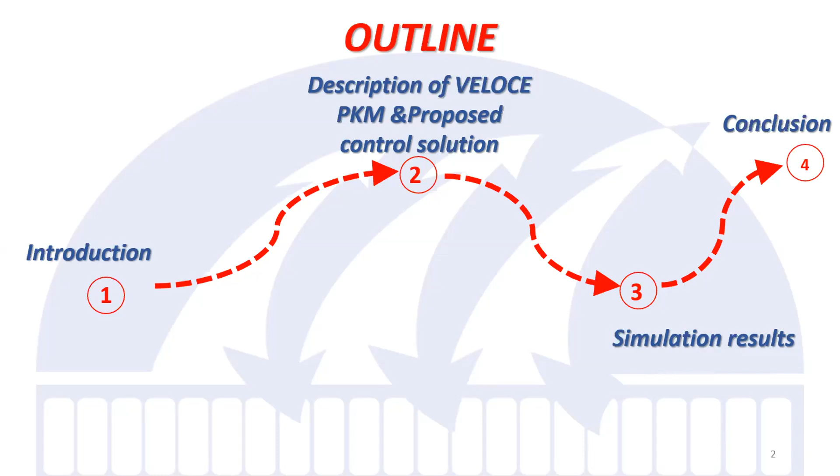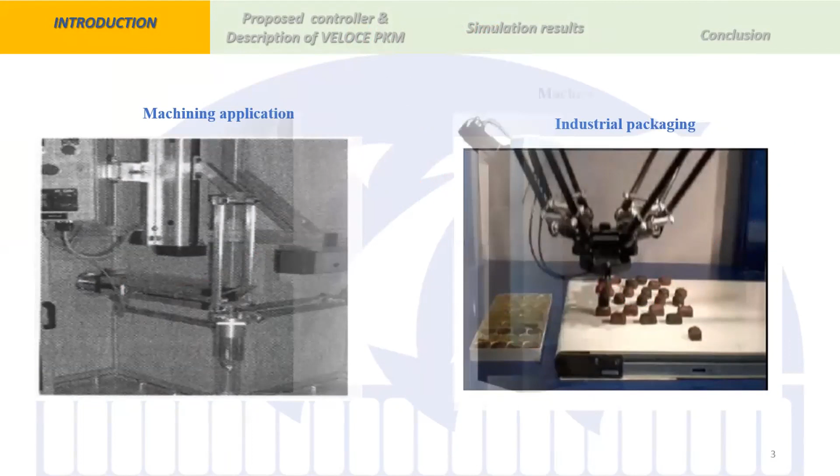During the last decades, industrial robots have played an important role in industry. According to their structure, robots are classified into two categories: parallel and serial. Parallel robots are used in a wide range of applications such as laser cutting, machining, industrial packaging, medical robotics, machine tools, pick-and-place applications, and so on. At present, parallel manipulators are the most suitable robots for tasks requiring high acceleration and high accuracy.

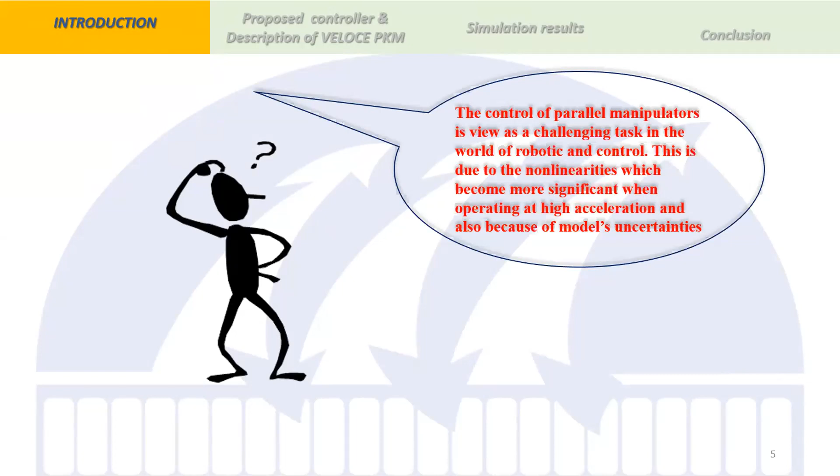However, the control of this type of robot is a challenging task. This is due to the nonlinearities which become more significant when operating at high acceleration, and also because of model uncertainties. In the literature, several control schemes have been proposed for the position control of PKM.

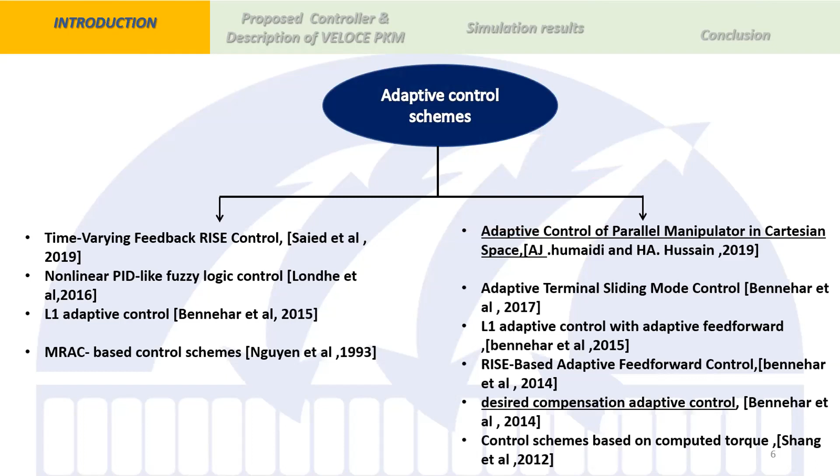These control schemes can be divided into adaptive and non-adaptive control schemes. In adaptive control schemes, we can find time-varying feedback RISE control, nonlinear PID controller, L1 adaptive control, and so on. In non-adaptive control schemes, we can find classic PID control, nonlinear PID controller, computed torque controller, sliding mode control, super twisting controller, and so on.

The super twisting algorithm is the most common second-order sliding mode algorithm. The super twisting controller generates a continuous signal which has the merit of canceling the chattering effect.

In order to enhance the performance of the super twisting controller, we propose to replace the integral term of the super twisting controller with a RISE control term. This choice is justified by the fact that the RISE control technique is non-model based and has the potential to accommodate a large class of uncertainties.

This control method is well known for a unique integral term, which is based on a signum function, as shown here. It can accommodate a large class of uncertain and nonlinear systems, like the class of parallel robots.

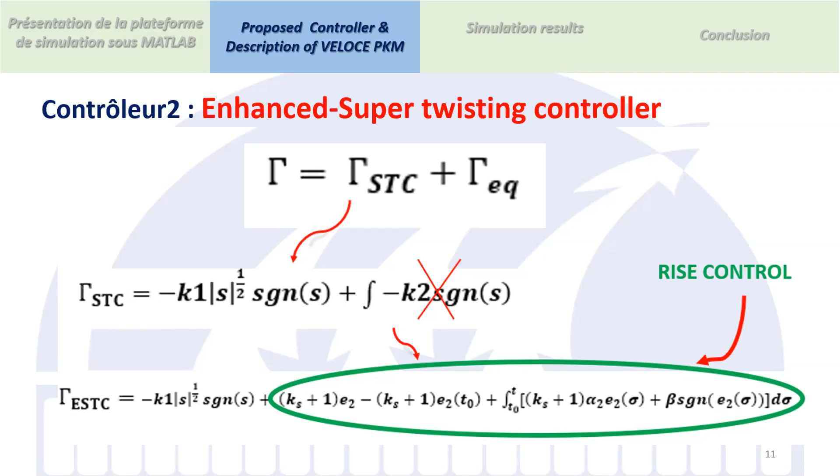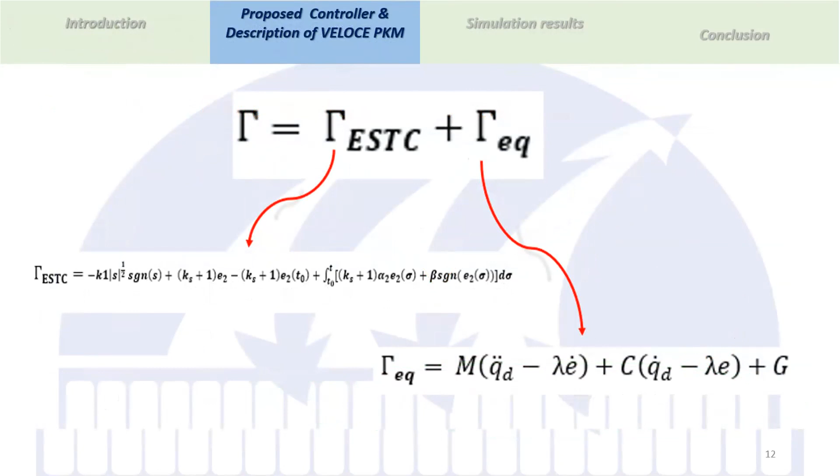The proposed control law is validated in simulation using a 4-degree-of-freedom parallel manipulator called VELOCE. The VELOCE robot is a 4-degree-of-freedom non-redundant parallel manipulator designed and fabricated at the Laboratoire d'Informatique, de Robotique et de Microélectronique de Montpellier for pick-and-place applications.

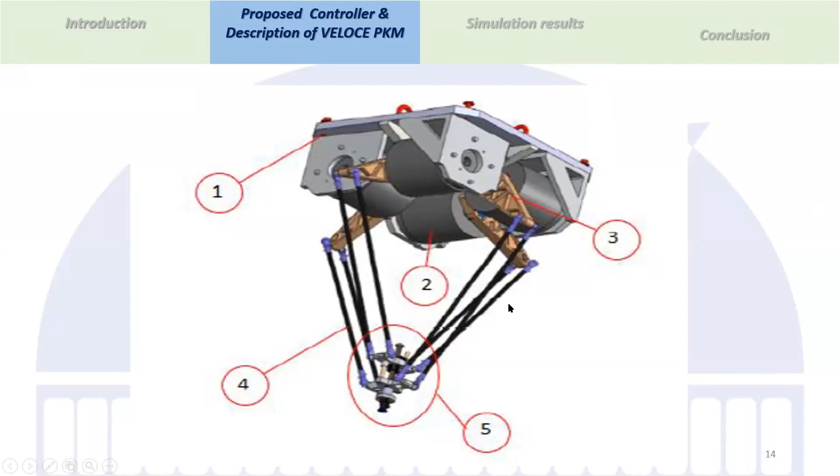The VELOCE robot is composed of a fixed base connected to the moving platform through 4 identical kinematic chains. The moving platform can perform 3 translational motions along the X, Y, and Z axes, and 1 rotational motion around the Z axis. In order to compare the performances of the two controllers, both were implemented in simulation, where 2 scenarios were imposed for evaluating the robustness of the proposed controller.

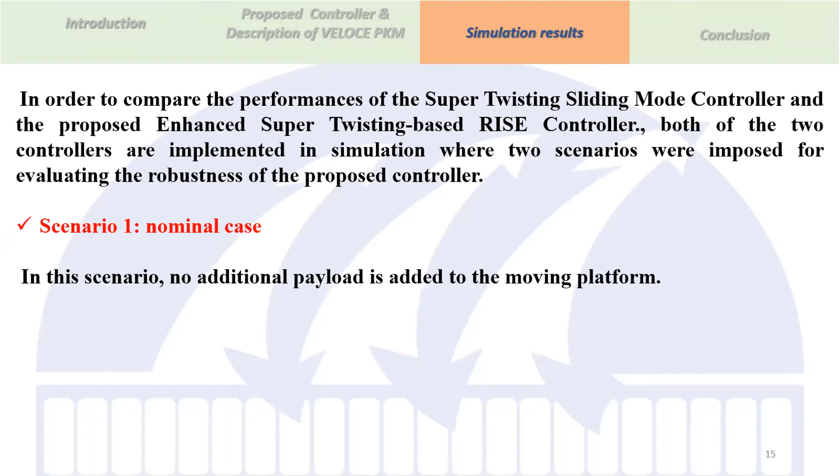In the second scenario, a payload of 2 kilograms is added to the moving platform, since the VELOCE robot is designed for pick-and-place applications. So it is important to test its robustness toward payload variation.

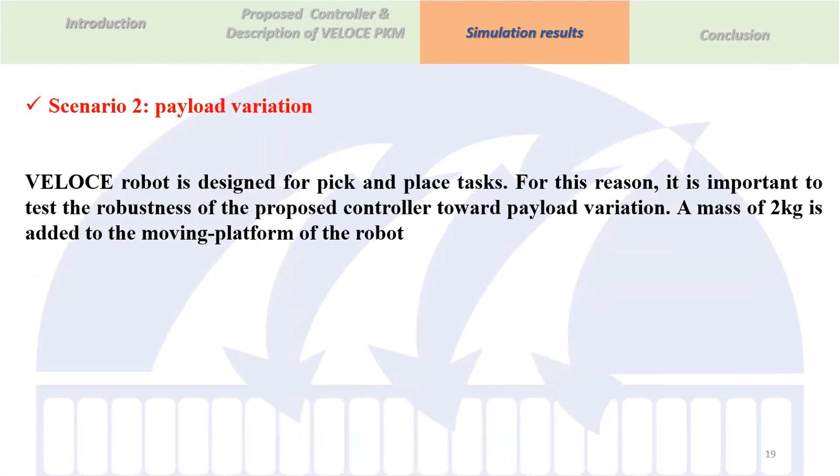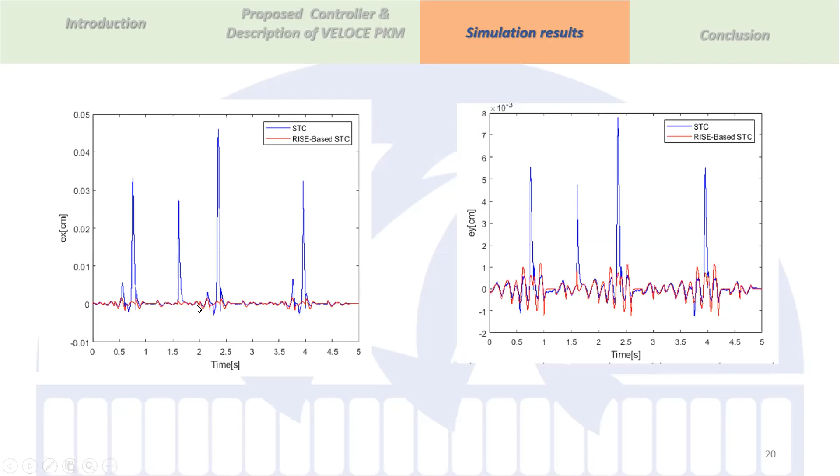After adding a mass of 2 kilograms, we can evaluate the proposed controller's performance toward payload variation. The enhanced super twisting controller ensures negligible errors compared to the super twisting controller.

In this presentation, the original super twisting controller has been enhanced by adding a RISE control term in order to improve the tracking performance in terms of accuracy and disturbance rejection. The proposed controller benefits from the advantages of the super twisting controller and the RISE controller.

In order to evaluate the effectiveness of the proposed controller, simulation has been established using a 4 degrees of freedom non-redundant parallel manipulator called VELOCE robot. The results obtained in simulation showed that the enhanced super twisting based rise controller overcomes the original super twisting control in terms of accuracy and payload variation.

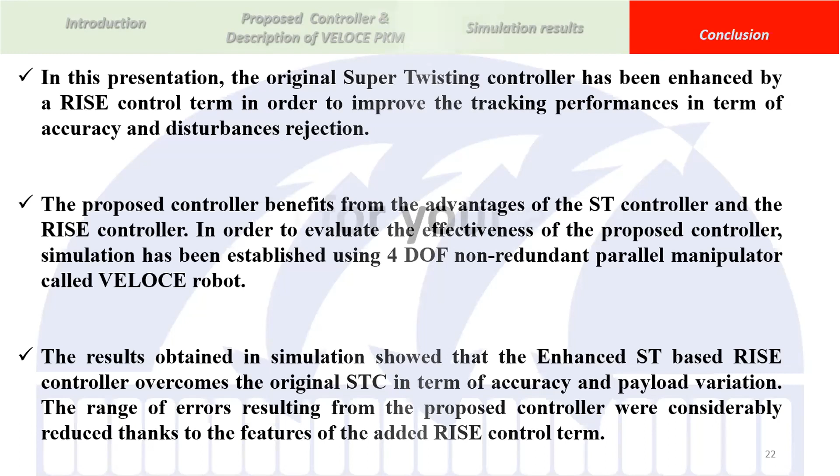The range of the errors resulting from the proposed controller were considerably reduced thanks to the features of the added RISE control term. Thank you for your attention.

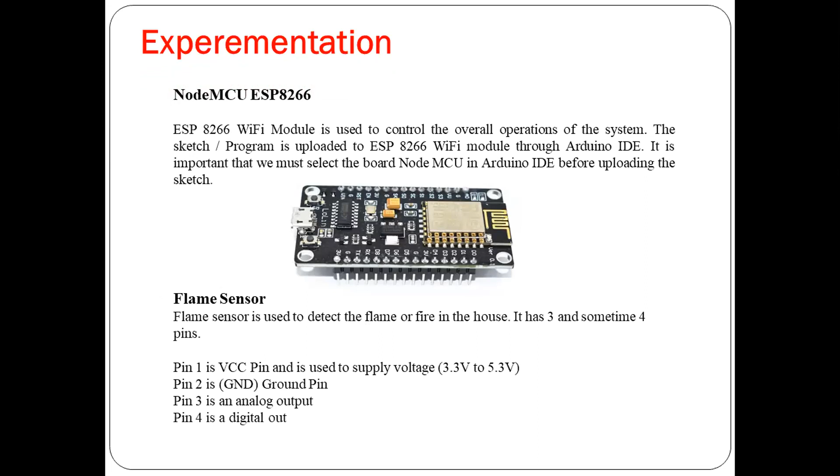The sketch program is uploaded to the ESP8266 Wi-Fi module through Arduino IDE. It is important that we select the board NodeMCU in Arduino IDE before uploading the sketch. Arduino IDE is the software used to transfer the sketch or code to our devices or microcontroller.

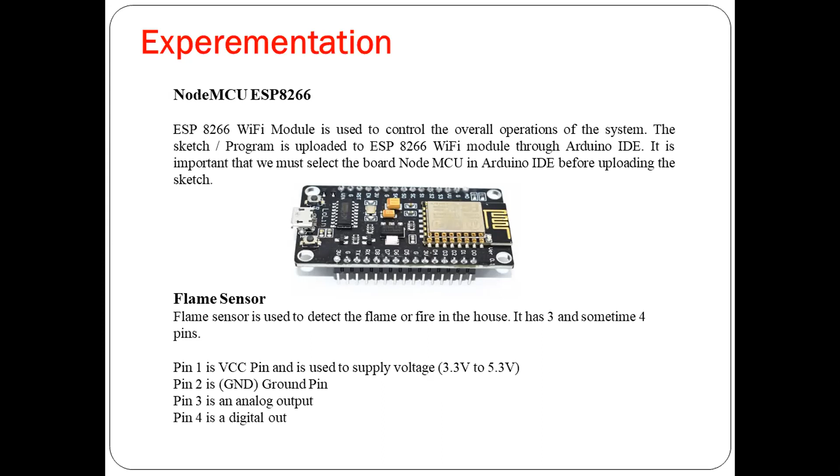Flame sensors are used to detect fires. It has sometimes 3 or 4 pins. Pin 1 is the VCC that is used to provide voltage. The second pin is the ground pin, the third pin is analog, and the fourth pin is digital.

Blynk is a very widely used IoT application. With the help of Blynk, we can build projects very easily. Blynk supports Arduino, Raspberry Pi, and other types of microcontrollers. Blynk can be easily downloaded from the Play Store, and it is free of cost.

Blynk includes the Blynk app. We can make our project with no need to write code. It has a GUI, graphical user interface. You just use drag and drop with buttons and make your app according to your own choice.

The Blynk server is used for communication. We can use the Blynk server, or we can make our own Blynk cloud.

The third step is setting up the Blynk app. After downloading the Blynk app, you can log in with your email or Facebook account. After login, you can click on create new project, and give the name to your project, like fire intimation system.

Select the device, which is NodeMCU, and select the connection type Wi-Fi. Then select the create button, and you will get the auth code. That auth code is mailed to your email address, and that is used in your project.

The circuit: flame sensor has 3 pins - D0, ground, and VCC - connected to NodeMCU. The D0 pin is connected to D1, the ground pin is connected to the NodeMCU ground pin, and VCC is connected to the MCU 5-volt pin.

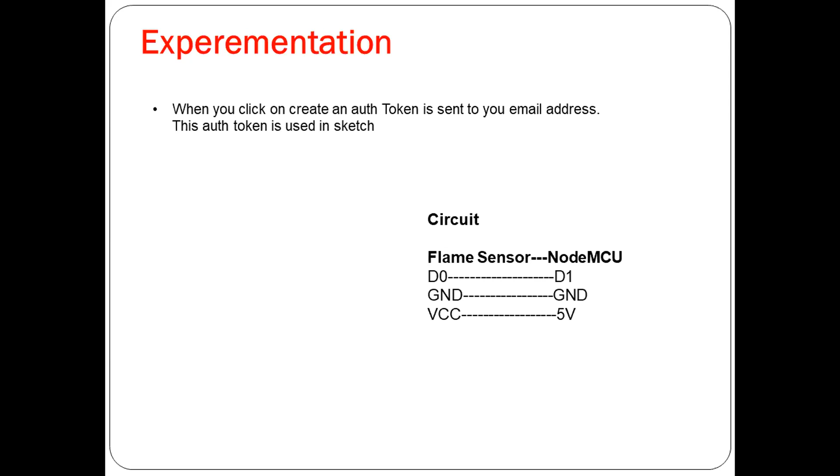The system works as follows: the flame sensor sends an alert to the NodeMCU ESP8266 module, and the NodeMCU ESP8266 Wi-Fi module is programmed in such a way that it receives the alert from the flame sensor and triggers or sends an alert to the mobile phone application.

Next is remotely controlling fan, lights, and appliances with the help of NodeMCU, ESP8266 Wi-Fi module, relays, and the services of the Blynk app. We can control lights, fan, and appliances. For this purpose, NodeMCU, relay, jumper wires, and the Blynk app are used.

The digital circuit consists of NodeMCU and relay. The NodeMCU ground pin is connected to the relay's ground pin, and NodeMCU is connected to the VCC. The NodeMCU D1, D2, D3, and D4 pins are connected to the relay's IN1, IN2, IN3, IN4.

If you extend the relay, like 4 channel, 8 channel, and 16 channel relays, then you can control up to 12 or 13 appliances at a time with this.

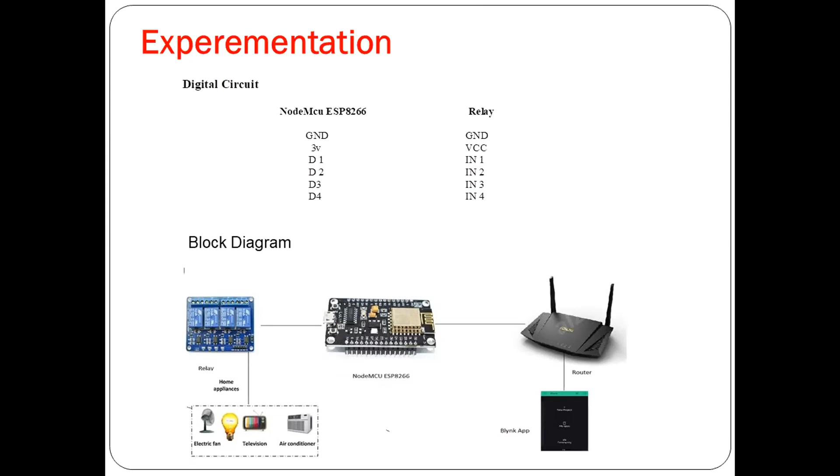Security system is a major component of the smart home. By installing a security system, we can easily detect suspicious or unwanted movement. In traditional security systems, we use CCTV cameras, which only record video but do not give warning about the intruder.

In this, we use the intruder detection system. When this system detects unwanted or suspicious movement, it will give an alert or buzz the alarm.

The following equipment is required for the class: PIR motion sensor, Arduino board used as the microcontroller, buzzer, and jumper wires. Here is the circuit.

The PIR sensor is connected to Arduino. PIR motion sensor VCC is connected to the 5V of the Arduino board. Output is connected to pin 3, and ground pin is connected to the ground pin. Buzzer's signal pin is connected to pin 9, and the minus pin is connected to ground. The PIR motion sensor is connected to the Arduino board.

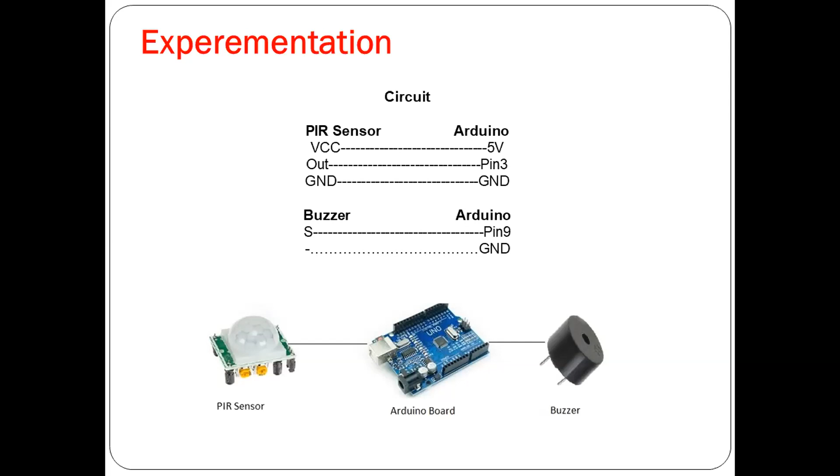The PIR motion sensor and Arduino board are programmed in such a way that when the PIR motion sensor detects suspicious activity, it will send an alert to the Arduino board, and the Arduino board triggers the alert to the buzzer.

Results and discussion: after successful implementation, all the results were successfully achieved.

The conclusion is that smart home automation systems available in the market are expensive, so there is a need to build a system that is cost effective for lower and lower-middle class families. With the availability of the Arduino microcontroller, we can make a low-cost smart home model effectively.

With the presented model, smart home users can successfully control home appliances. They can also get alerts about unwanted suspicious activity, and in the safety system, in case of a fire, the intimation system detects the fire and alerts us in time.

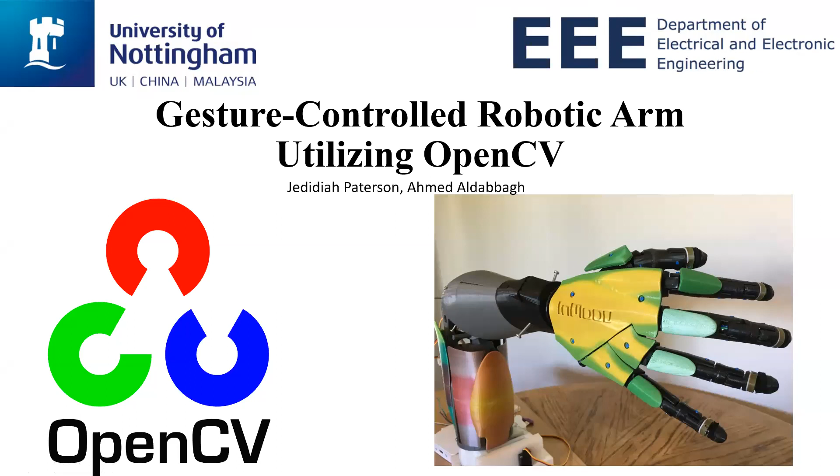What I'm going to talk about today is typical human-computer interface interactions, my system overview. I'm going to give you a flow chart that shows how I process my images, a couple of my methods, what my project doesn't successfully do, and what it does do. Then I have a short video presentation at the end that shows my arm moving.

Typical human-computer interactions for gesture recognition fall into two separate categories: either data glove collection or computer vision. Data gloves are extremely highly accurate, but they do have a few drawbacks - they can be cumbersome to wear for long periods of time.

They do have a little bit of associated additional cost. If they want to be wireless, they need those Bluetooth RF chips, which are now a little cheaper, but they need a battery support system. If they're a wired glove, you lose mobility. They also need a lot more sensors to determine the movements of the hand.

With computer vision applications for gesture recognition, we have various degrees of success depending upon the camera arrangements and the type of cameras used. But as camera technology is ever increasing, we decrease the cost of these cameras that will be available.

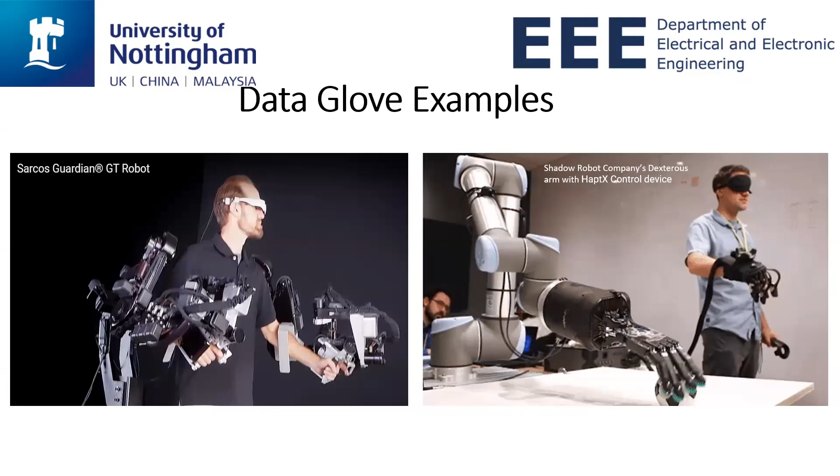One really cool thing about the Shadow Robot Company, though, is they do have a robotic arm going to the ISS shortly. Hopefully with computer vision, we can get rid of the need for these larger components, and shipping control devices to isolated locations like the International Space Station will become a lot cheaper.

My robotic arm and the system overview here. So basically I have a very low cost camera. I use a USB 2.0 webcam that is inherently installed on my computer, which supports an Intel i7 processor, to capture my hand gestures. I do image processing on my computer, then transmit wirelessly over a wireless network to my Raspberry Pi. Communication is using TCP/IP socket protocols, and then I tell the robot arm which ways to move.

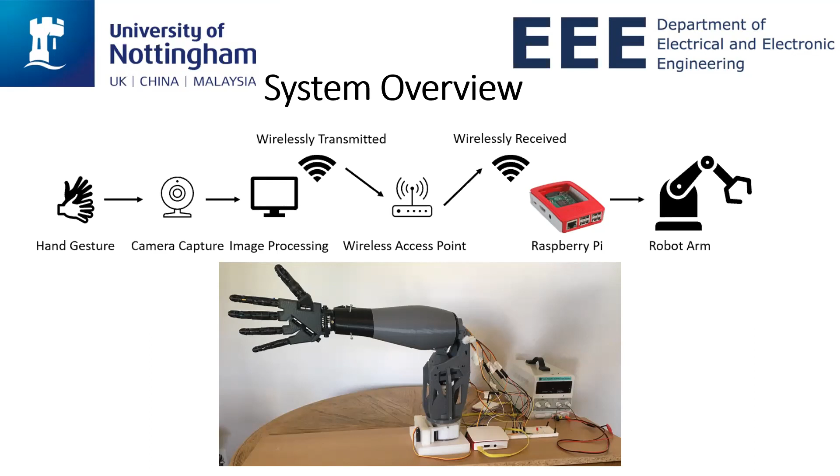The image processing, there is a lot going on here. When you capture the image, you've got to do a load of processes to extract key features from your hands. I'm going to cover some of these in a couple of slides and explain why some of these are very important. So the first step is you apply a Gaussian blur. This gets rid of really harsh edges and allows the image to be prepared for further stages of image processing.

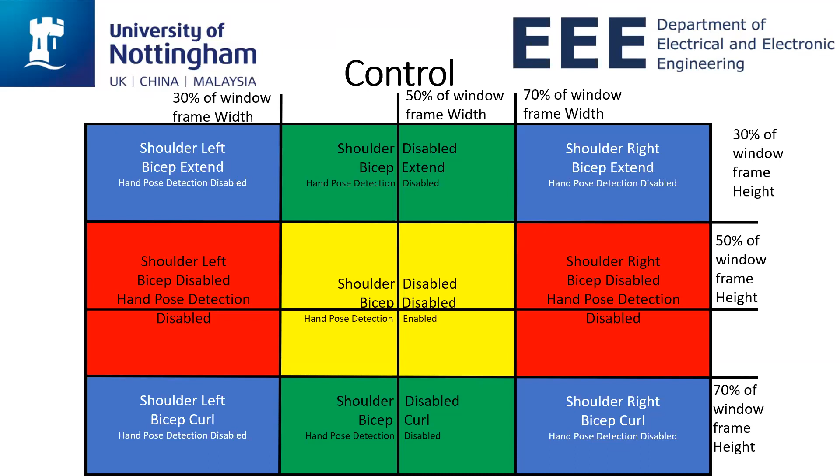Achievements that I have made with this project: the robotic arm is completely wireless. It can move around into different locations, or the host application can move. So I don't need to be a set distance, as long as I'm communicating over this wireless local area network.

I've got a hand gesture recognition range from 0.3 meters to 1 meter, and it operates in real time.

The one thing the system doesn't do is it still needs calibration for your hand color. It can only recognize one hand at a time. Background lighting and dynamic lighting still cause an issue. Individual finger manipulation is not possible, but it could be if we looked at the contours, broke them into smaller pieces, provided interpolation, and figured out how to find the maximum of the quadratic from that interpolation. But that would need to be profiled to see if it can be done in real time.

In conclusion, this is a viable method of controlling robotic arms, but it needs further development. I just have a short video demonstration of me moving the arm around, closing the hand and opening it.

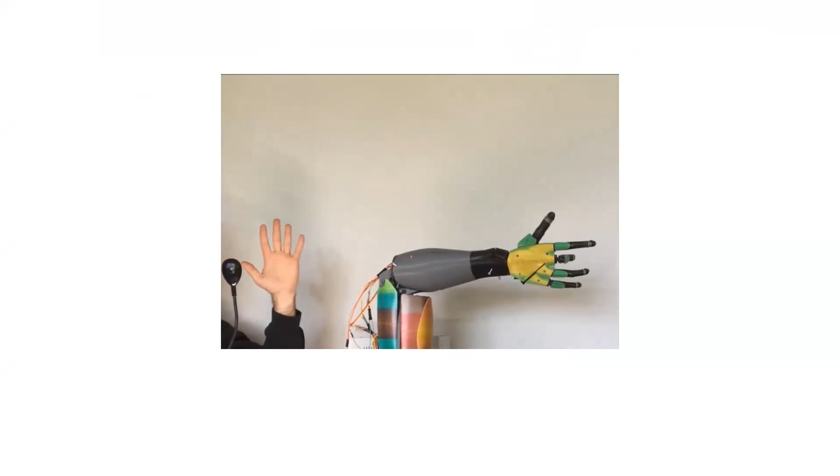The processor I used here was a Raspberry Pi, which does not like PWM control very well, so it was very difficult to get these servo motors working all at the same time.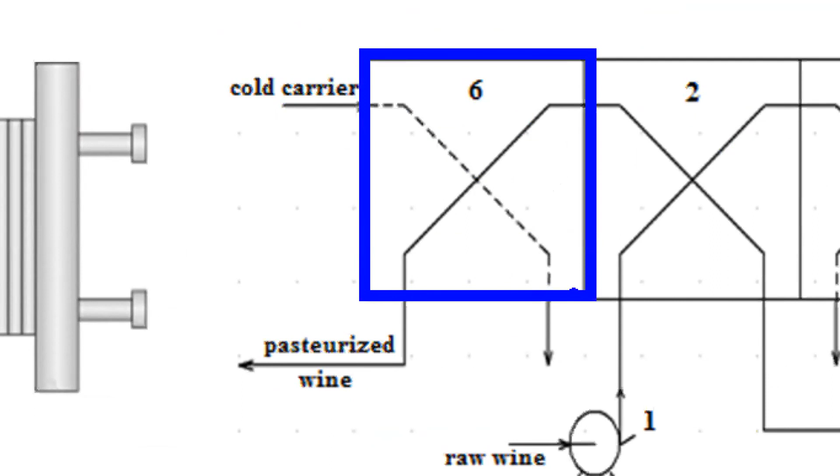Then it enters a containment vessel where some cooling of the already pasteurized wine happens, lowering its temperature to some extent. It enters again the regenerative section, where it heats up newly coming raw wine, after which in the cooling section the wine gets cooled down to the desirable exit temperature, for example 20 degrees, by interacting with the cold carrier, which is iced water with a temperature around 1 degree Celsius.

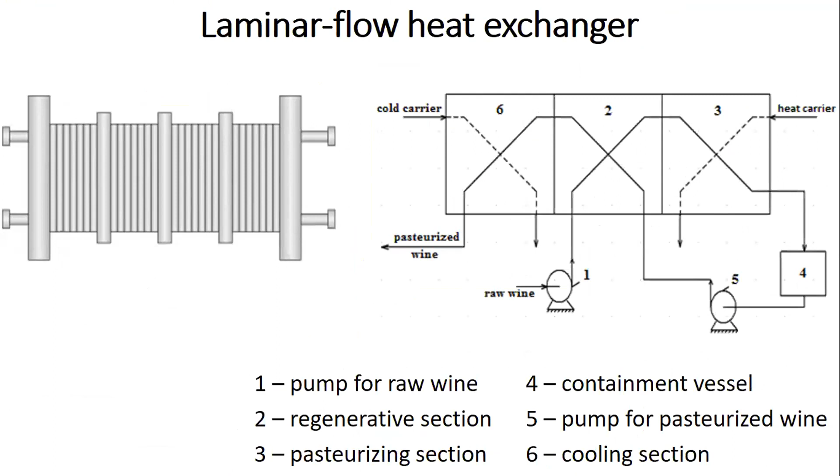Wine pasteurization installations can be regarded as automation objects with these input and output dimensions. In our work, the controllable parameter chosen is the pasteurization temperature at which the wine exits the pasteurizator, the heat exchanger. The control impact chosen is the flow rate of the primary heat carrier, and most of the interferences or disturbances apply.

In wine processing, a specific disturbance is the deposition of wine precipitates on the surface of the heat exchanger, which could be mitigated with proper washing of the system.

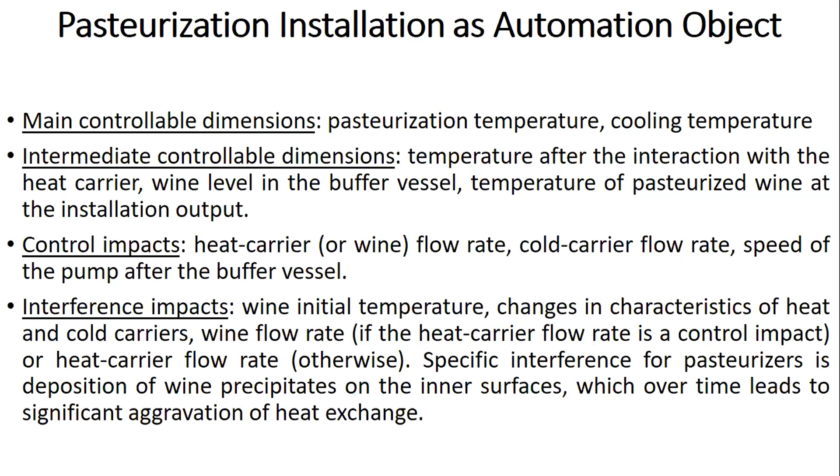This is the key diagram of the automated system. The raw wine enters here at the entry point and fills up the VCL. This is a buffer vessel. Here is the pasteurizer, heat exchanger number 1.

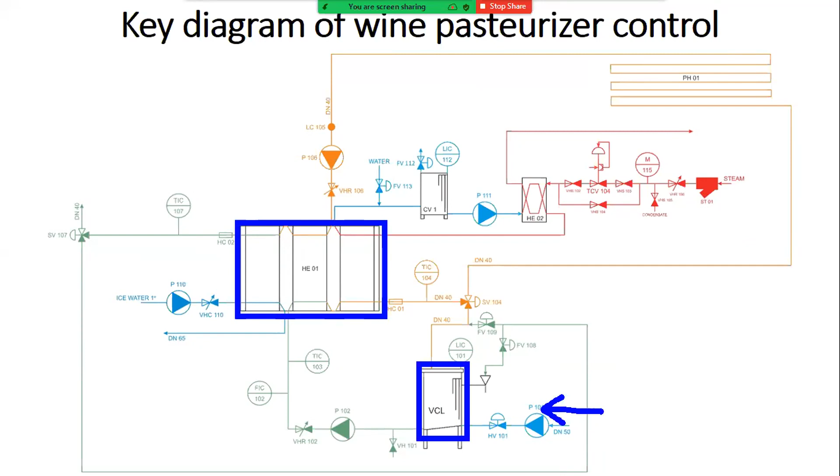So the normal flow of the wine, if everything is okay, is from the entry through the buffer vessel, through the product pump 102, enters the regenerative section as described before, then the pasteurization section, and exits the pasteurizer. If the temperature measured here is in the accepted range, the wine goes to the containment vessel, which in our case is several pipes where it cools down to the environment, to the atmosphere. Then the wine again enters the regenerative section, the cooling section, and exits cooled down to the desired temperature, and then goes to a filling machine where it can be filled in bottles as desirable.

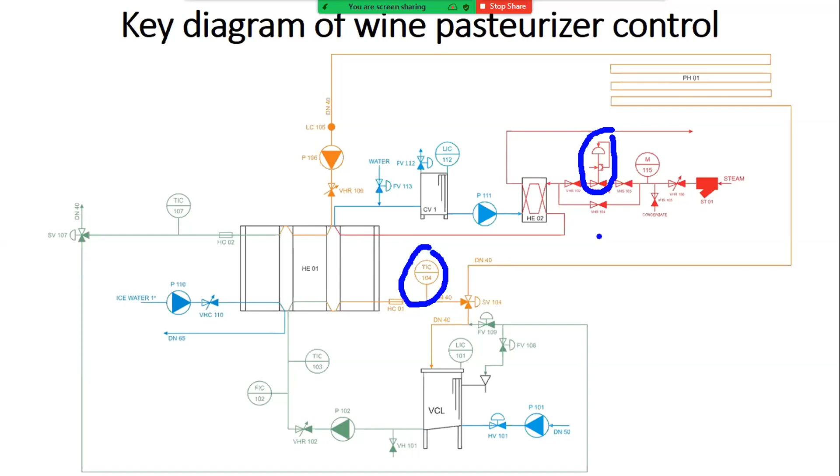So we control the pasteurization temperature, which is measured by this temperature sensor. If it differs from the target value, this valve changes its position, which controls the steam flow. The steam is our primary heat carrier, so when we adjust this valve, more or less steam is entered to the system. It raises or lowers the temperature of the second heat carrier, which is applied to the wine. So the wine temperature is controlled this way.

For the implementation of our automation system, a Siemens programmable logic controller S7 is used. It is chosen for its compact design, large instruction set, and relatively affordable price. The software program is written with Totally Integrated Automation Portal from the same company using ladder logic, and also Siemens human-machine interface is used.

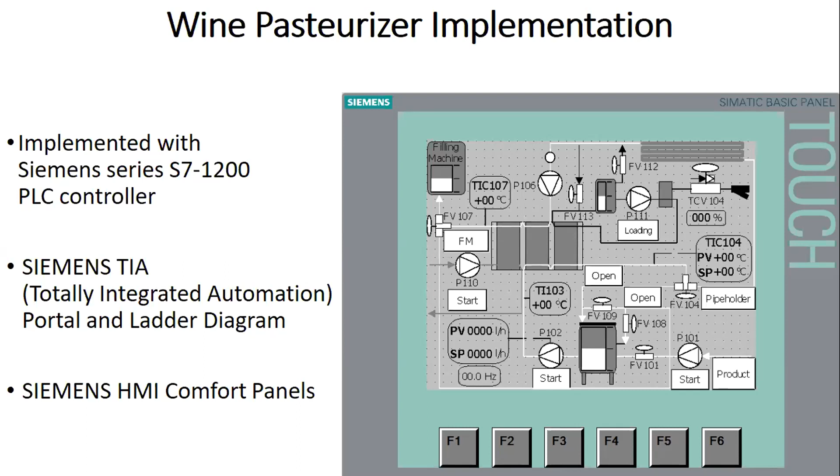On the slide is present one of the comfort panels of the HMI with all the devices present in our system. Here is the control of the product pump 102, which was right after the buffer vessel.

It is controlled by a frequency regulator using a flow meter, and the flow rate of the wine is set by the operator. For example, for 2000 liters per hour of wine, the pump needs to revolve at 3000 revolutions per minute. Here is a diagram of the control of its speed with proportional integral action.

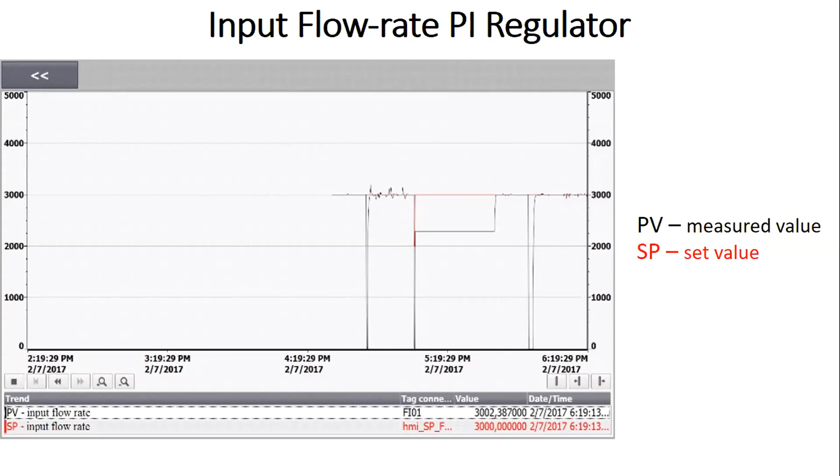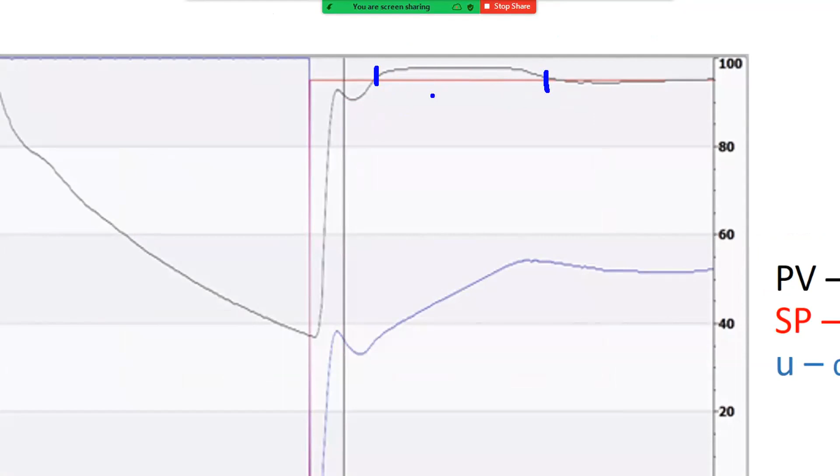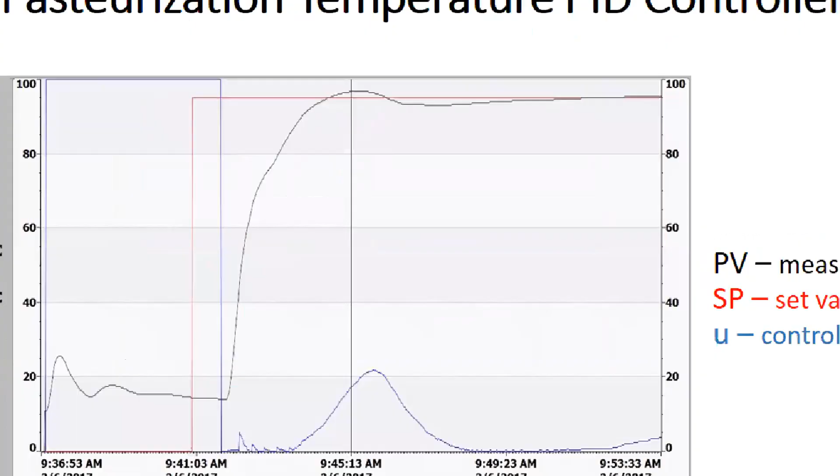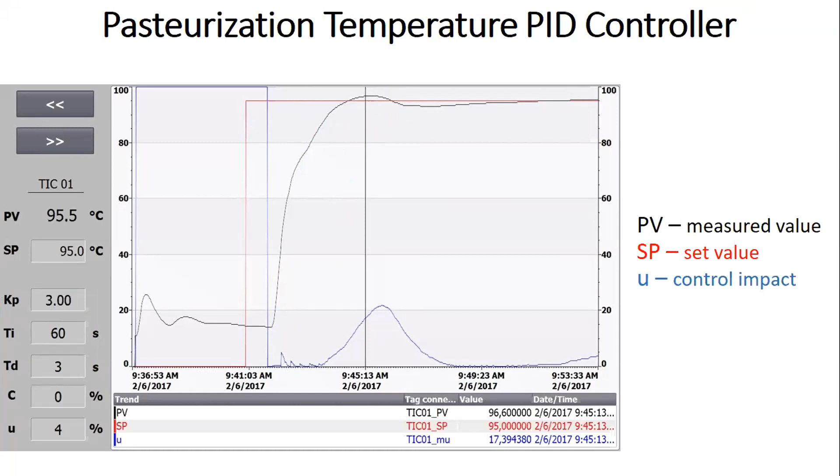So secondly we chose a PID controller, and with determined optimal coefficients of the PID action, the shown control is achieved. As you can see, the overshoot here is much shorter, and temperature rise is smoother than with the previous regulator. There are no fluctuations here in the temperature, so this controller was finally chosen for our system.

In conclusion, the automation system can be applied to two of the most commonly used pasteurization techniques with different temperatures, which can be adjusted. Optimal regulator coefficients are determined for temperature maintenance, and the automated program would facilitate the work of the human operator and reduce human error in this pasteurization process. The system is always open for further improvement by adding additional features. Thank you very much for your attention.

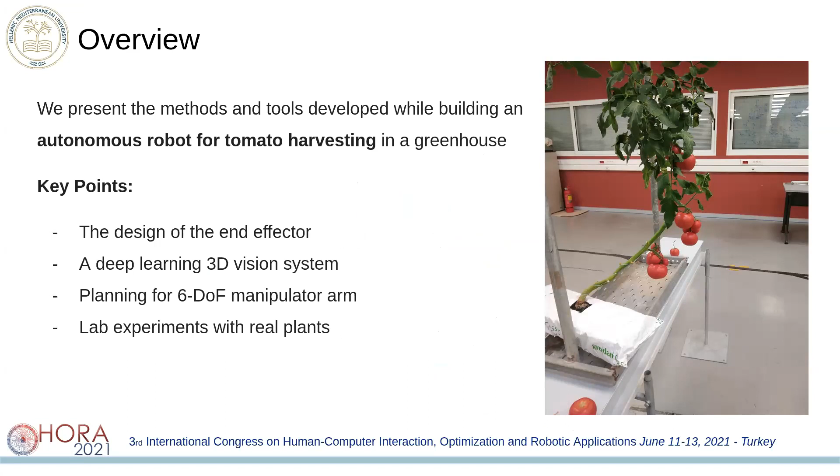There's a growing effort to incorporate robotics and automation technologies in the agriculture business. This has a few benefits, like standardization of the cultivation processes that lead to constant quantity and quality, smaller environmental footprint. It can replace some labor-intensive tasks that are also sometimes repetitive or boring, and it can reduce the cost, and it can give better control over the chemical environment in the greenhouse by managing pesticides and fertilization.

The challenges we faced while developing the robot were locating the cutting point on the peduncle, because it has color similarities with plant leaves and branches. It has a variable shape and size, and we often see occlusions. There's also the design of the gripper, which needs to be flexible enough to work in crowded areas, and strong enough to cut the peduncle. During those procedures, we need to avoid damaging the crop or the fruits, which requires precise detection, planning, and awareness of the environment.

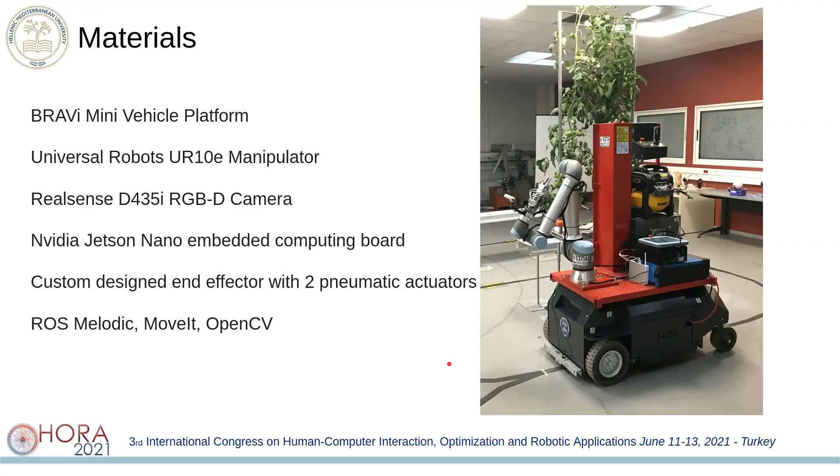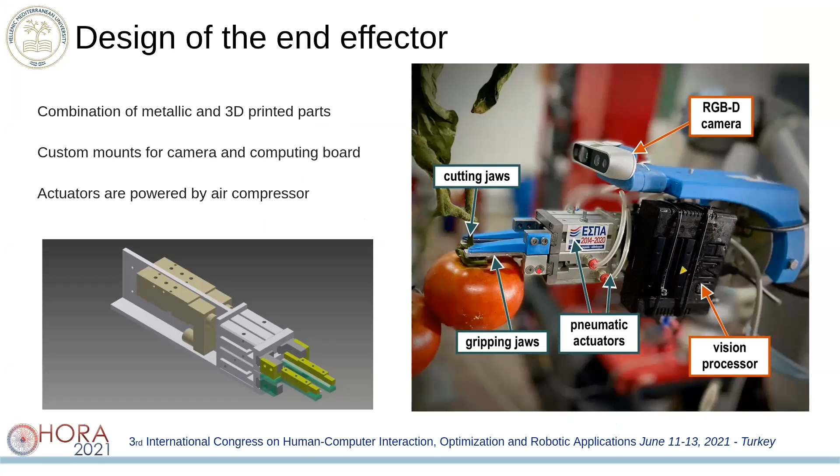Here we can see a closer look of the end effector: the mount of the camera, the microprocessor, and here we can see the two grippers. The bottom one is used to secure the peduncle, and the top one is used to cut it.

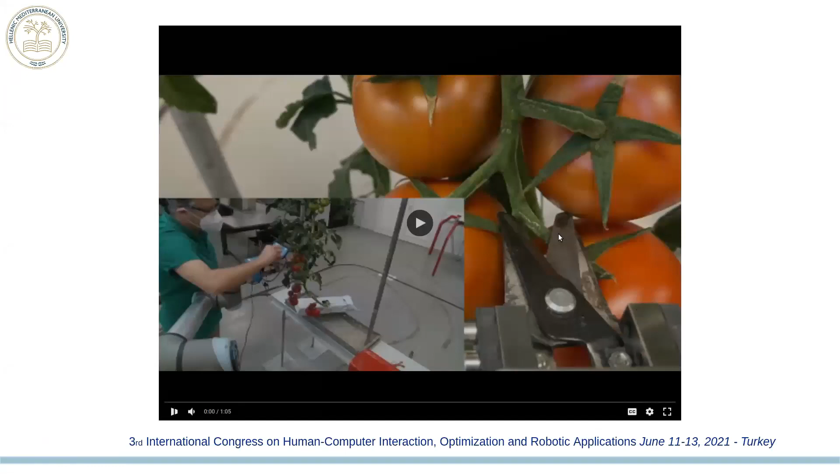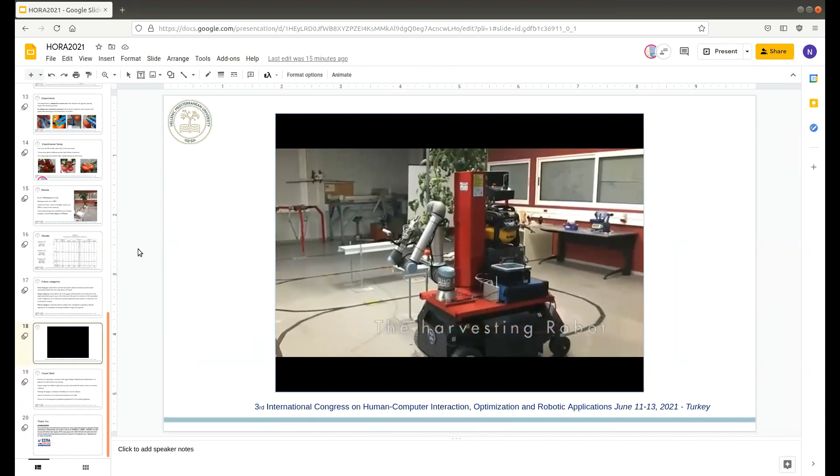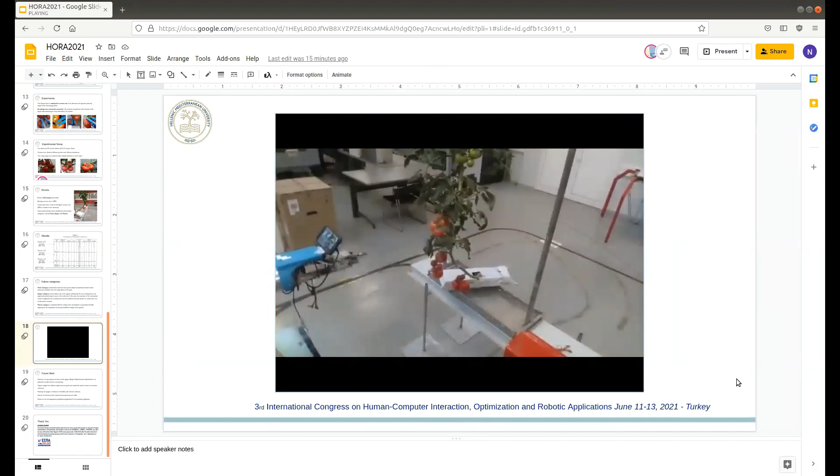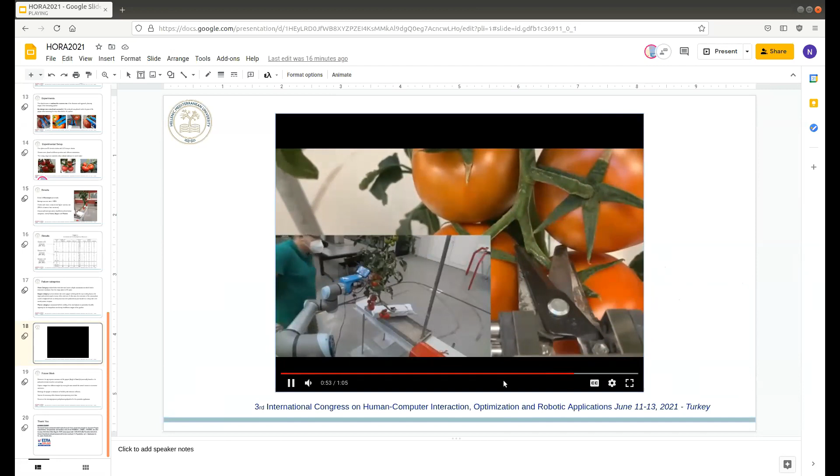Here I have a video for one attempt. Let me refresh that. I don't know if you can see that. So that was the video.

Some improvements we would like to make in the future: determine an appropriate orientation of the gripper, or angle of attack, based on the orientation of the peduncle. We need to make some patterns to avoid occlusions in case we detect a tomato in the current view but are unable to locate the peduncle. We can pivot around the point of interest to find an angle where the peduncle is visible. We will also redesign the gripper to maximize its flexibility and minimize collisions.

We should probably improve the accuracy of the detector for the class peduncle by incorporating more data, and we can test different path planning algorithms to find the one with the fewer failures. That was it. Thank you for your time.